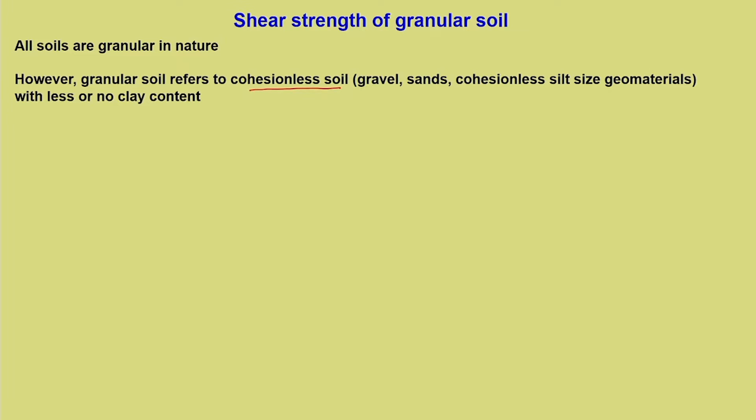This will include gravel, sands, or cohesionless silt size geomaterials, because this will include materials like fly ash, which are essentially silt size and hence can be considered as geomaterials with less or no clay content. So here, when we say granular soil, it essentially refers to cohesionless soil.

It does not possess true cohesion, that means it is the absence of natural cementation. But some granular soils like sand can exhibit what is known as apparent cohesion, which is condition specific. It depends upon the water content or the degree of saturation of that particular sand.

You might have noticed that it is fairly comfortable walking on beaches which are partially wet. Why is this so? This is mainly because of the capillary action or the negative pore water pressure, which we call soil suction, which is present in partially saturated sands. Hence it imparts more strength and you are able to walk comfortably on beaches.

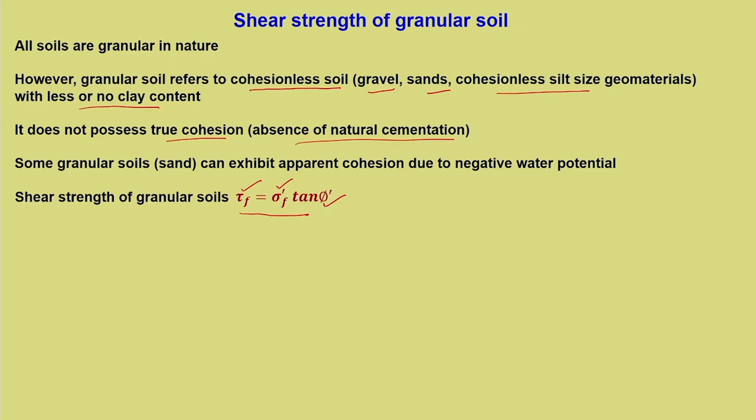Please note that tau f has no prime, while sigma dash f, the normal stress, is always in terms of effective stress. Phi dash is mostly determined by either direct shear test or drained triaxial test, because the permeability of granular soil is fairly high.

The initial state of the granular soil, whether it is loose, medium or dense, affects the shear strength. Now what is this initial state? It depends upon the initial unit weight or packing or compaction state, and is generally defined by the term relative density, which all of you know.

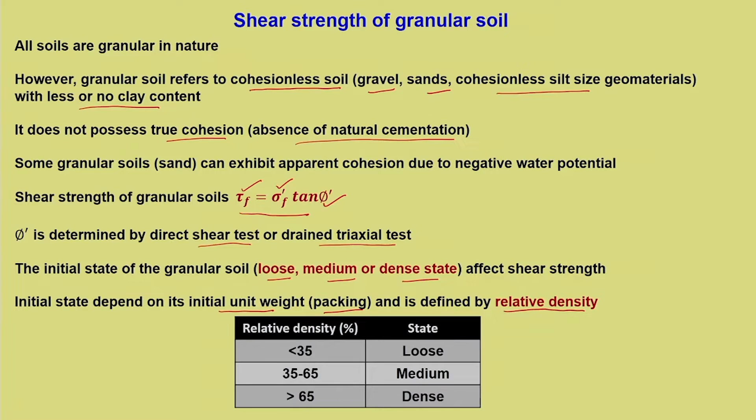As a guideline, a relative density less than 35% is considered loose, 35 to 65% is medium, and greater than 65% is considered dense. So we are basically discussing three states of the granular soil, defined in terms of loose, medium and dense. This relative density takes care of the kind of initial packing of the granular materials.

Now we will see the typical stress strain response of sand, a granular material, from a typical direct shear test, wherein the x-axis is represented by lateral shear displacement and the y-axis is given by nominal shear stress tau. Now, we know that in a direct shear test it is very difficult to quantify the strain and the true stresses acting on the failure plane, or on a given plane.

The reason is the area of the direct shear box keeps changing during the test, because there is horizontal movement of the upper box. So it is very difficult to state the true stresses acting, hence the term nominal shear stress tau. And instead of strain, we express this in terms of lateral shear displacement, or relative displacement.

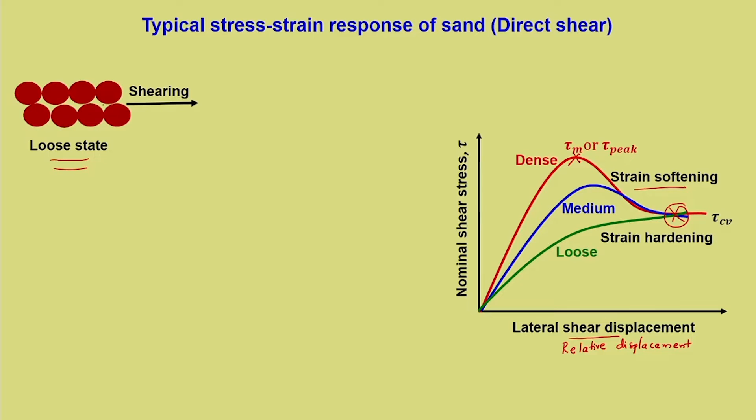Now what is happening is this is what a loose state represents. That means soil particles are loose, and when this loose state is subjected to shearing, that is horizontal movement, what will happen is when the loose state of the granular soil is sheared, particles can move horizontally, and when it moves horizontally in this direction, the particles move downwards. As you can see the arrow, all these particles go and fill into the voids because it is a loose state, and hence it moves downwards.

This is a very important aspect which we need to understand. When a loose state is sheared, particles move horizontally and downwards, as shown by the arrow, and hence it undergoes compression during shearing. This is an important point to keep in mind. A loose state, when sheared, undergoes compression. This is a very important observation.

In the case of dense state, it is already in these voids, so there is good interlocking of materials. Now let us say that this dense state is sheared. For shearing, it has to move horizontally. What is the possibility of such a movement? If it has to move horizontally, then it has to undergo some movement. So that we will see.

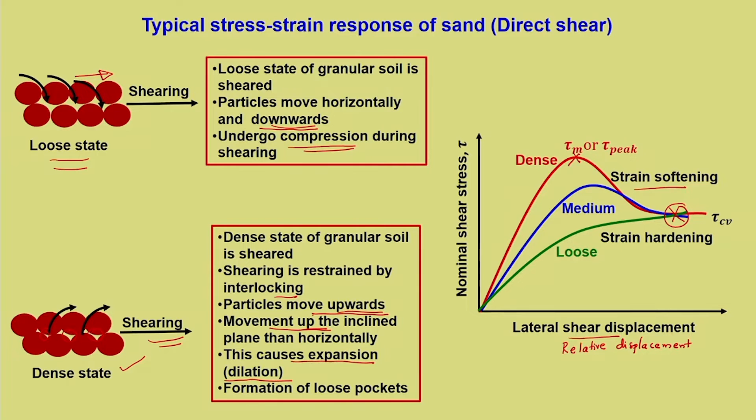So movement is up the inclined plane rather than horizontal. If it has to make any sort of horizontal movement, the movement of this particle is more like moving up the inclined plane, so it has to do additional work. This causes expansion, known as dilation. Please remember this carefully: when a dense state of soil is sheared, to execute shear it has to expand, known as dilation, and during dilation there are formations of loose pockets, because a dense material which is packed, when it expands, definitely leads to the formation of loose pockets.

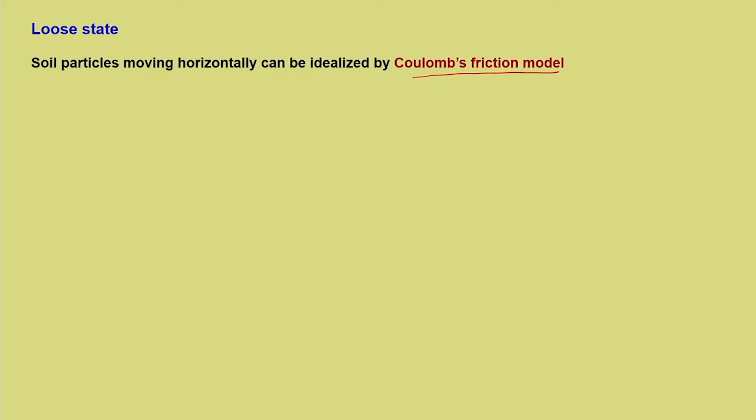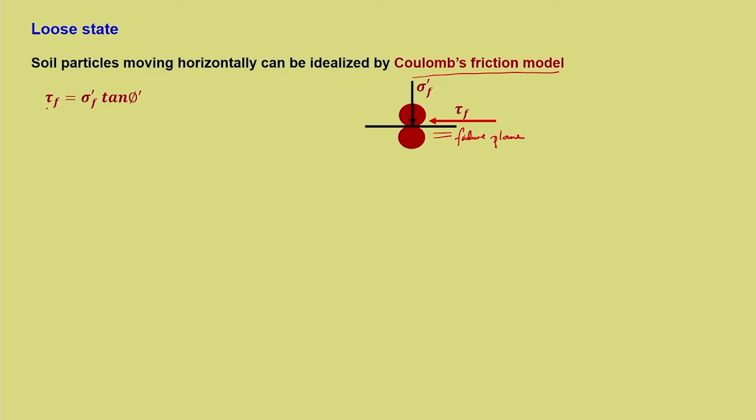So this is the difference in behavior when a loose and a dense state of material is sheared. Now let us see a loose state in detail. Soil particles moving horizontally can be idealized easily by Coulomb's friction model, as we have learnt, because here it is a loose state, there is an intergranular contact where tau f and sigma dash f are acting. This is the predefined failure plane along which it acts. We know Coulomb's friction model is applicable only when there is a failure plane attached to it. So we can easily write tau f is equal to sigma dash f tan phi dash, no confusion in that.

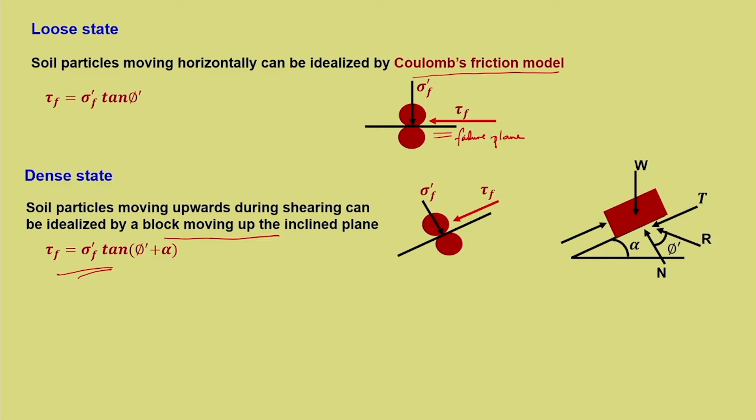There can be upward and downward movements for particles, but generally in the case of dense soil, for explaining the shear behavior, we normally refer to dilation or expansion. The expansion or dilation in the dense state increases the friction angle component. This is what it is. So it increases from phi dash to phi dash plus alpha. The additional component alpha is called the dilation angle, very important.

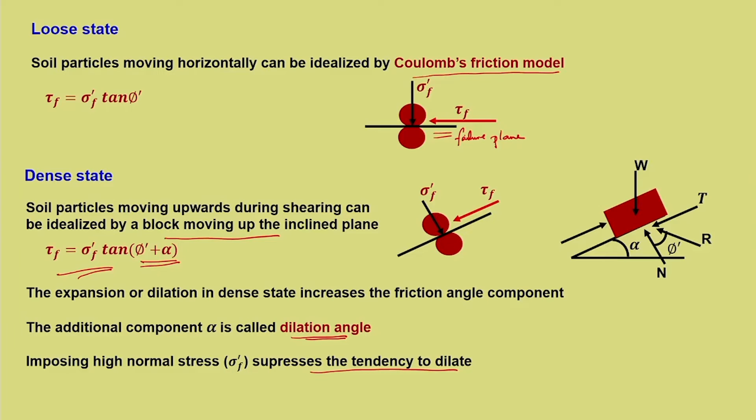Now, imposing high normal stress, if the normal stress is more, this particle will not be able to traverse in the upward direction. You are restricting movement from the upward. There is a confinement, which will not allow particles to move upwards freely. This means the amount of dilation that happens is a function of normal stress. Normal stress acts like a confining stress from above, so imposing high normal stress suppresses the tendency to dilate, because of which the dilation angle decreases.

Now we will see this again. There are some facts we will enlist: dense and medium compacted granular soil exhibit peak shear strength specifically at low confining stress, because the dilation has to happen. Only then does the dilative behavior, expansion followed by peak behavior, occur. This peak is a function of dilation behavior. Peak behavior occurs at low strain or relative displacement due to particle interlocking and dilation, and it is mostly a stiff response, meaning particles are tightly held.

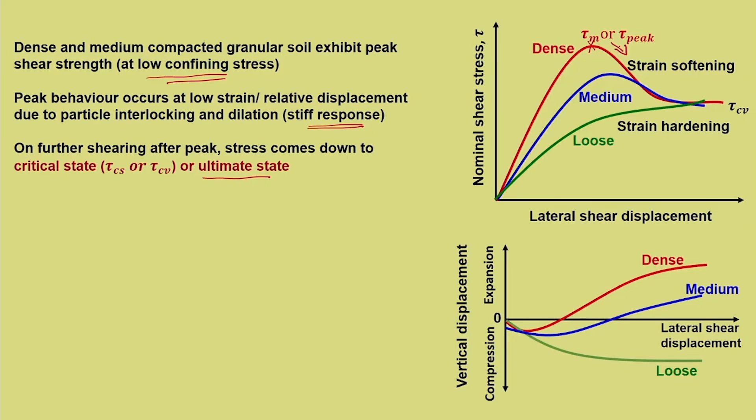So it is a stiff material. The peak happens at low strain. Stress keeps increasing, reaches a peak, but this peak behavior is exhibited at relatively lower strain, not at higher strain, or expressed in terms of relative displacement, and this happens because of dilation or particle interlocking. On further shearing after the peak, stress comes down to critical state, tau Cs or tau Cv, also known as the ultimate state. We have already mentioned this movement downwards - the stress comes down.

This post-peak reduction is called strain softening behavior. Critical state, or constant shear strength, occurs at large strain, generally 10 to 20% relative displacement. This is defined differently in different codes, but generally it's 10 to 20% strain level where you can expect critical shear strength.

Loose state does not exhibit a peak and directly approaches tau Cv, as can be seen here. The progressive increase in stress after yielding, post yielding, is called strain hardening behavior, which is denoted here.

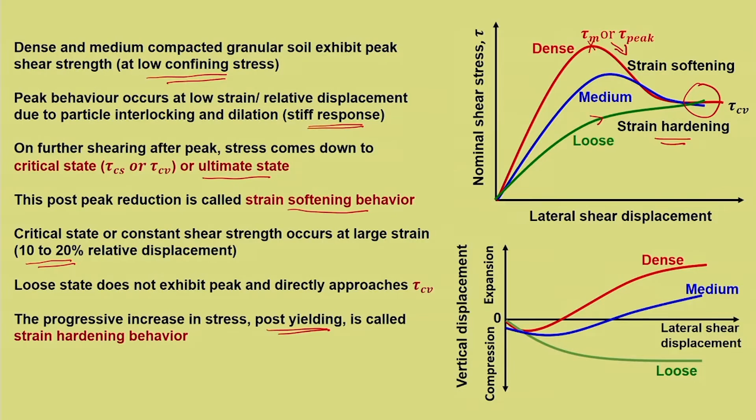Now that is about the stress strain behavior we have discussed. Let us see what happens to the volume, because we do not generally discuss undrained or no-volume condition. For granular soil, there will be volume change, and we will see how it happens for dense and loose states.

The volume of dense sand decreases initially and then dilates. Here on the y-axis is vertical displacement, and on the x-axis is lateral shear displacement or relative displacement. For dense soil, there is an initial decrement in vertical displacement, which is compression - below is compression, and above is no volume change and expansion. For dense soil, there is initial compression followed by an increase in volume, which we call dilation. By the time it dilates, it reaches the peak behavior.

Volume reaches constant at high strain or relative displacement. By the time it reaches critical state, the volume change also remains constant - there is no more volume change. It reaches a constant volume at high strain condition, close to critical state. Loose sand undergoes progressive compression, or progressive densification, till it attains critical constant volume or critical state volume, also at high strain.

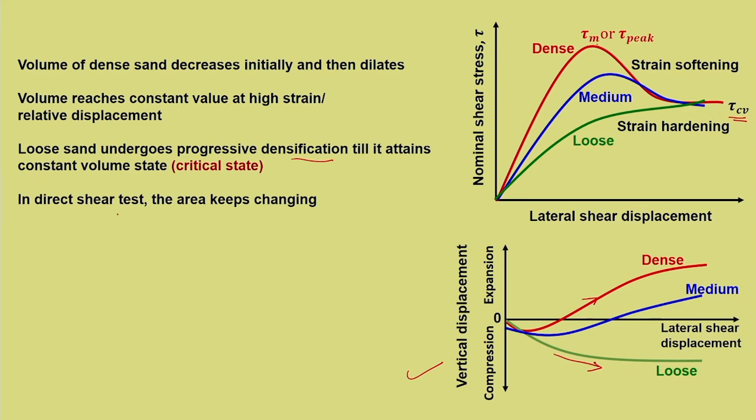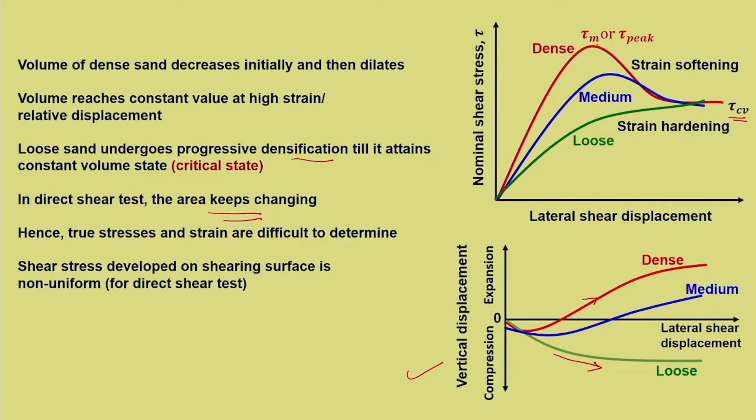In direct shear test, the area keeps changing, hence true stresses and strain are difficult to determine, as already explained. Shear stress developed on the shearing surface is non-uniform for direct shear test, because at the edges and towards the center it will not be the same.

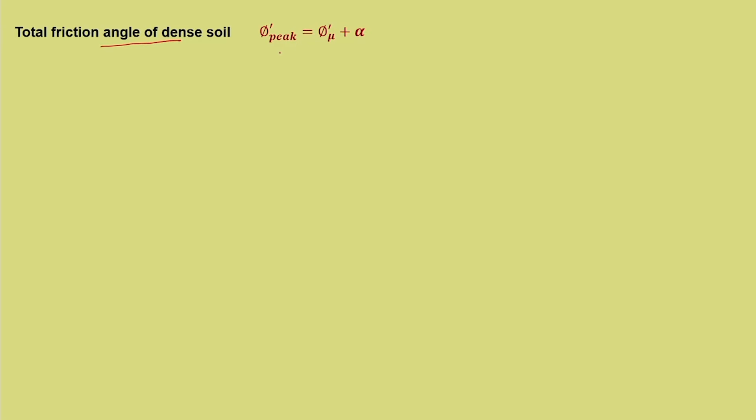Now, for dense soil, the total friction angle can be written as phi dash peak equals phi dash mu plus alpha. We have already discussed what alpha is. The peculiarity about alpha is that it increases with an increase in relative density. We have seen that depending on relative density, dilation keeps changing, so that will be reflected in alpha. Alpha becomes a function of initial state or denseness - if it is more dense, alpha will be more.

Now, phi dash mu, this component is due to friction mobilized at intergranular contact, that is particle interaction, and this is somewhat a fundamental aspect of soil. Alpha is the effect of interlocking and dilation, and hence a function of normal stress sigma dash f. So in this total friction angle of dense soil, phi dash mu is a function of particle interaction, and alpha is a function of dilation.

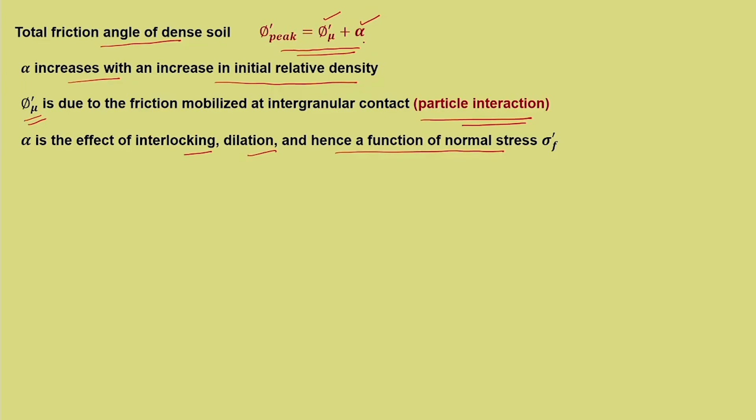Since alpha is a function of dilation, and we have already seen that alpha is a function of normal stress, if normal stress is more, it suppresses the dilation. So, we will see the effect of sigma dash f on alpha and Coulomb's failure line, and how it changes the Coulomb's failure line.

This is tau versus sigma, which we normally use to represent shear strength behavior. For a cohesionless material, this is Coulomb's failure line without dilation, represented by phi dash. OP is the failure line represented by Coulomb's model.

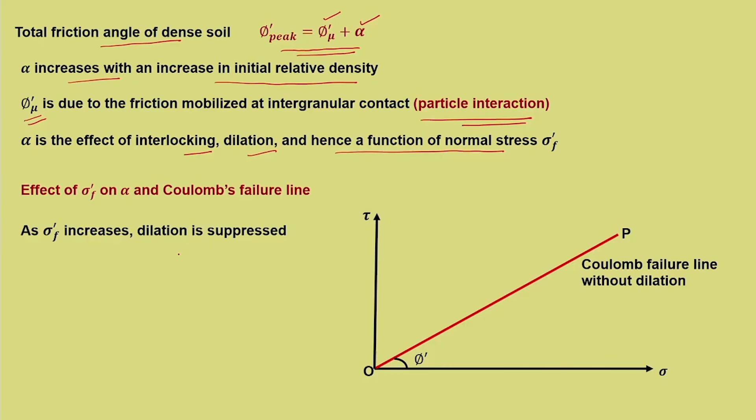As sigma dash f increases, the dilation is suppressed. So, corresponding to sigma 1 f, let us say it is a dense soil. It will have the dilation angle alpha 1, corresponding to tau peak 1. That is the first state.

Now, as the normal stress increases, for example at sigma 2 f, what is happening? We can see that the dilation angle gets reduced. This is the phi dash, and that is what is denoted by phi dash mu.

What is above that? Above phi dash is alpha 1, that is getting added. At lower normal stress, alpha 1 is more, but as sigma 2 f increases, alpha 2 is less than alpha 1, which is denoted by point r.

This results in a curved Coulomb's failure line, which is due to dilation. If you join through these points, you will get a curved line. Alpha reduces with sigma dash f and hence results in a curved failure line, represented by OQRS.

At some sigma dash f along this x axis, there is a complete suppression of dilation. If you keep on increasing, there will be another point here. At some point, there is a complete suppression of dilation and alpha tends to 0, and the failure line merges with the initial failure line, where Coulomb's failure line without dilation is there. So, alpha becomes equal to 0.

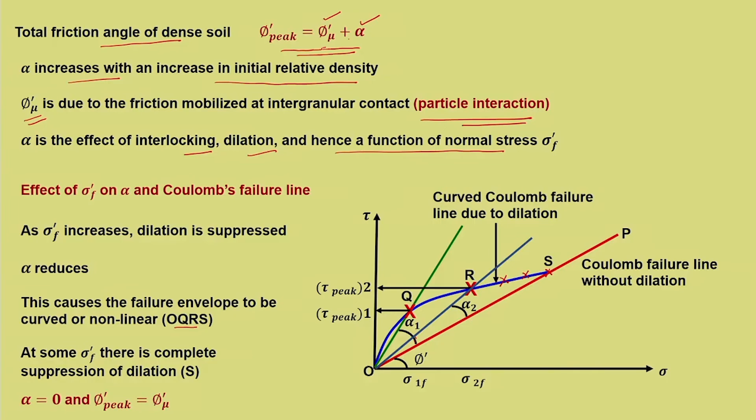At this particular point, alpha is 0 and phi dash peak is equal to phi dash mu according to this equation. So, alpha is 0, and phi dash peak is equal to phi dash mu.

So, dilation angle alpha is the measure of change in volumetric strain with respect to change in shear strain, and phi dash mu can be termed as the friction angle corresponding to critical state or constant volume.

First we have tried to understand what is phi dash mu. Now, what is the significance of this phi dash mu? Because this is the fundamental aspect or the fundamental friction behavior of the soil. Whatever be the state, there will be some kind of friction angle, which is the critical state friction angle. We will be able to appreciate this better when we finish the 4th module on critical state.

For the time being, let us understand that there is always some value which remains and which can be mobilized by a soil, that is a critical state, and phi dash mu is termed as the friction angle corresponding to critical state or constant volume. So, phi dash Cs is equal to phi dash mu.

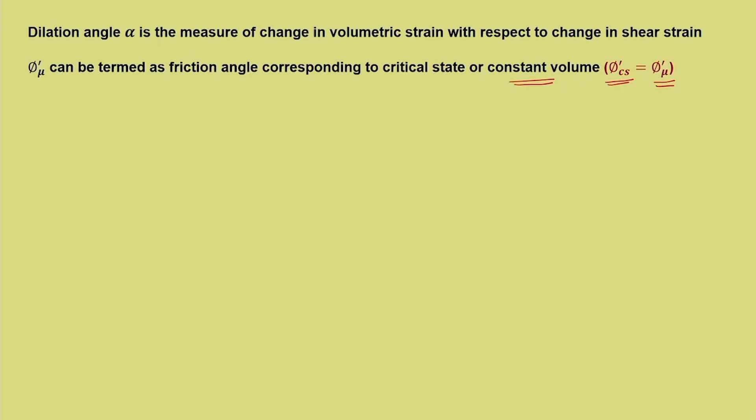Now, whether dilation happens or not, that will determine alpha, or the additional component that gets added to the soil. So, shear strength corresponding to peak behavior is called peak shear strength, tau peak, expressed as tau peak equals sigma dash f tan phi dash plus alpha.

Strength corresponding to critical state is called critical state shear strength tau Cs, given by tau Cs equal to sigma dash f tan phi dash Cs. Remember this is critical state friction angle, and phi dash peak is equal to phi dash Cs plus alpha.

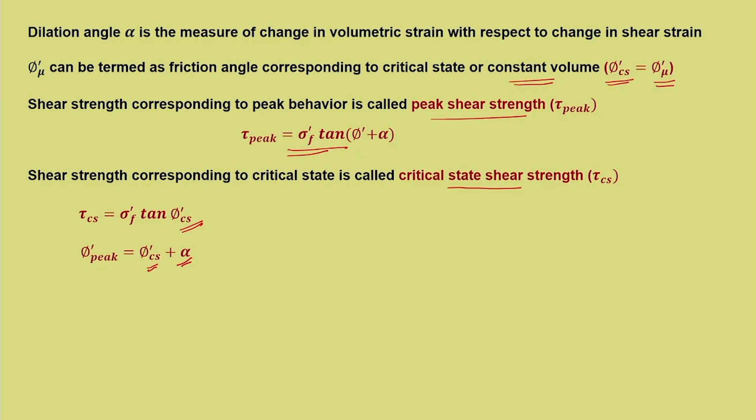Earlier we have written this in terms of phi dash mu for our initial understanding, but where does it boil down to? It boils down to phi dash Cs. So, Coulomb's failure line without dilation, and here this friction angle which is mobilized by soil at any state, that is phi dash Cs. On top of it we get alpha, which gives phi dash peak.

Alpha generally ranges between 0 and 15 degrees. Phi dash Cs is the effective friction angle at critical state shear strength, a fundamental soil parameter. This aspect of fundamental soil behavior can be better appreciated again when we discuss it in module 4.

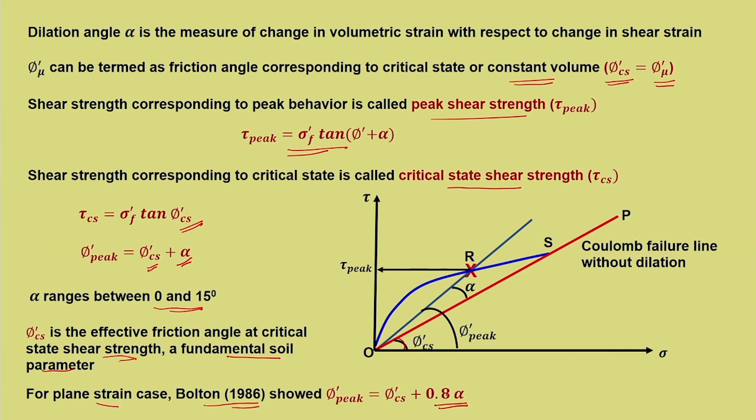For a plane strain case, Bolton in 1986 showed that phi dash peak is equal to phi dash Cs plus 0.8 of alpha. Here we have taken plus alpha, but there is not much difference; specifically for plane strain condition, Bolton explained how the dilation angle contributes to phi dash peak.

So, that is all for now. We will see in the next lecture the remaining portions of shear strength of granular soil, wherein we will discuss 3 aspects: one is the critical void ratio, then Taylor's model, and something called intrinsic friction. These 3 aspects will be covered in the next lecture. Thank you.